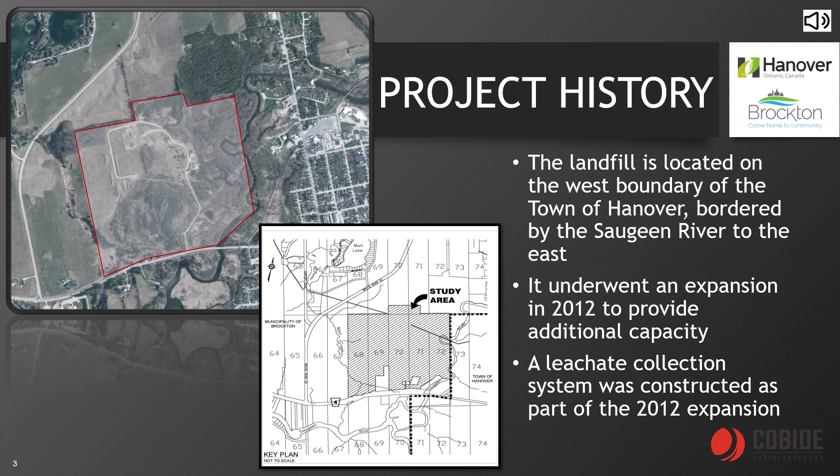During the expansion, a leachate collection system was installed with leachate being stored in an underground tank, which is pumped and trucked by a licensed liquid waste hauler to both the Hanover and Walkerton wastewater treatment plants for treatment and disposal. With projected growth of Hanover and Brockton and the expansion of the landfill to accommodate additional active filling areas, a solution to the long-term management of leachate is required.

Leachate volumes can vary due to precipitation, active area of disposal, cover soil characteristics, and landfill development, and they have become highly unpredictable due to the dry or wet climatic conditions. Based on the original leachate management report that was prepared during the design of the expansion area, the total fully developed projected leachate volume for the landfill was estimated to be 8,400 cubic meters per year or 23 cubic meters per day. It is anticipated that leachate volumes will fluctuate significantly during the active development of cells 1 through 4.

This is because during the early stages of cell development, the drainage layer of the leachate collection for each cell will have exposed surfaces with no waste and will be in direct connection to precipitation events. Although the expansion area is projected to be developed in 4 cells, the design of the leachate collection system must accommodate the entire expansion area once final closure has occurred and at various stages of its active development.

Since the construction of cell 1 and 2 and the reshaping of the slope at cell 1, there has been an increase in leachate being collected from the site. For example, in October 2020 to September 2021, there was an average of 21.5 cubic meters per day of leachate hauled to either Walkerton or the Hanover wastewater treatment plants. This was partially due to cell 2 being connected to the system, as well as the slope on cell 1 being regraded to final grades.

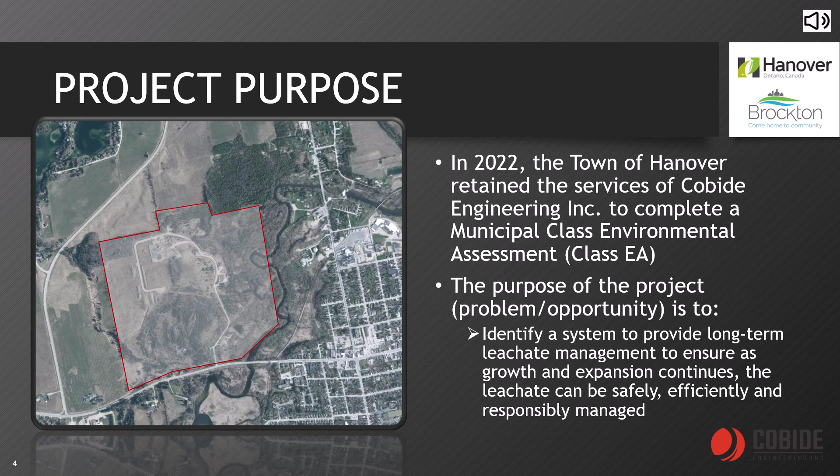As previously mentioned, in 2012, the landfill underwent an expansion to construct cell 2, where an impermeable liner was placed with the leachate collection piping system and backfilled. The leachate collection system drains into a tank on the far south side of cell 2 adjacent to the access road turnaround. This expansion allowed for additional waste disposal area.

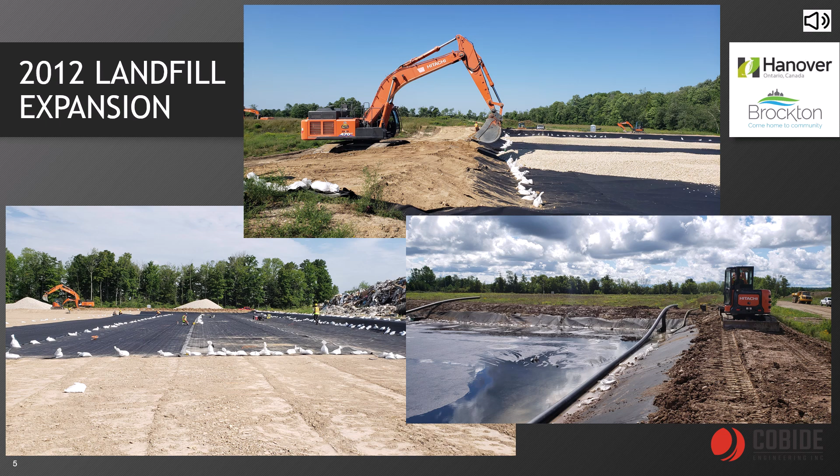In May 2025, a third cell, Cell 3, will be constructed, which will increase the production of leachate and volumes due to the square area that will be added to the current collection system.

The existing leachate collection system consists of an underground piping system that collects the leachate and drains it into an underground storage tank. The storage tank can accommodate 50,000 liters, or 50 cubic meters, of leachate before it needs to be emptied. Schaus Sanitation is currently contracted to pump, haul, and dispose of leachate from the underground tank on an as-required, as-needed basis.

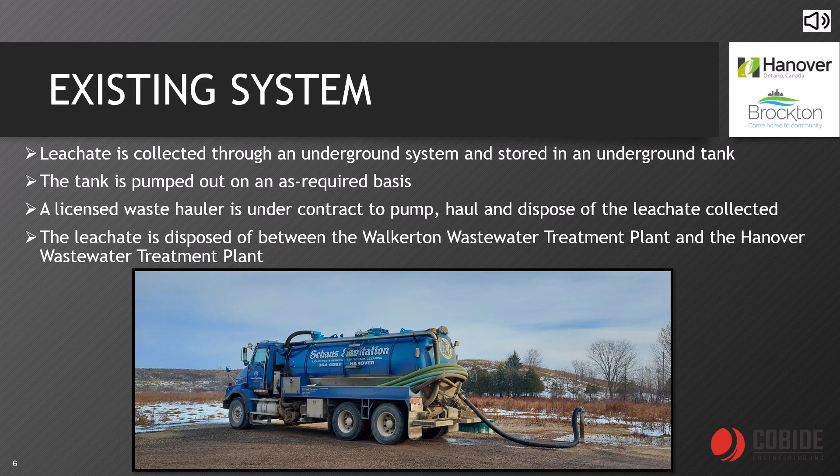The leachate is hauled and disposed of at either the Hanover or Walkerton wastewater treatment plants. Since leachate properties can vary drastically, a slow release of the leachate into the wastewater is required, hence the reason that it is sent to either the Walkerton or Hanover wastewater treatment plants. This method aids in the dilution of leachate, making it a little easier to treat combined with the wastewater.

What is leachate, and what makes it so hard to treat? Leachate is considered any liquid produced when water percolates through any permeable waste material. It can contain elevated levels of general chemistry parameters such as pH, acidity, alkalinity, anions, metals, and other volatile organic compounds.

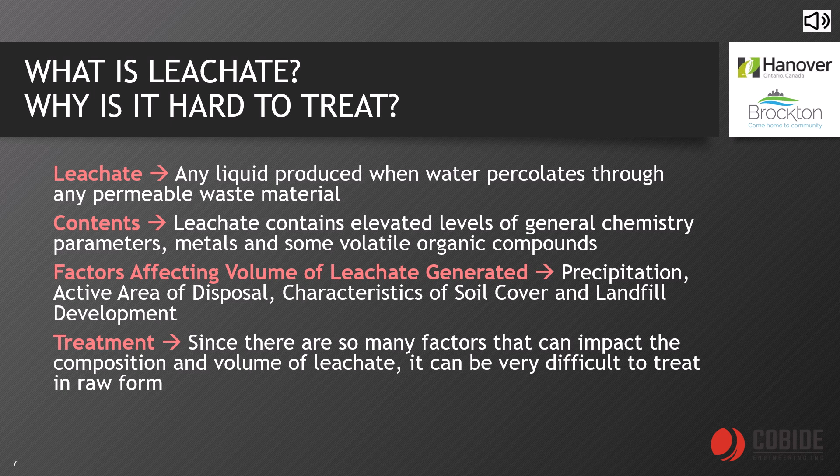Leachate composition can vary greatly due to many factors, such as what type of waste is contributing to it, precipitation and environmental factors, runoff characteristics of soil cover, etc. These factors also impact the volume of leachate generated along with landfill development and the active area of disposal. All of these factors affect the overall treatment since they impact the composition and volume, making it difficult to treat the leachate in its raw form.

Due to the nature of leachate and anticipated increasing volumes with the construction of Cell 3, and as growth and expansion continues in both communities, the Town of Hanover and the Municipality of Brockton decided that a long-term solution for the management of leachate at the Hanover-Walkerton landfill site be explored through the Municipal Class Environmental Assessment process.

A Municipal Class EA helps municipalities plan infrastructure projects by evaluating their potential environmental impacts, ensuring compliance with the Environmental Assessment Act, and fostering environmentally responsible development. It is a process that considers various factors to minimize negative effects on natural, cultural, social, and economic environments.

The MCEA classifies projects in terms of schedules based on varying environmental impact. The classifications are as follows. Exempt: exempt projects may have a minimal adverse environmental impact and consider public notification. Eligible for screening to exempt: these projects may have minimal adverse environmental impact and require completing an archaeological screening process to determine if they're exempt or if they're a Schedule B. Additional public notification should be considered even if the project is exempt.

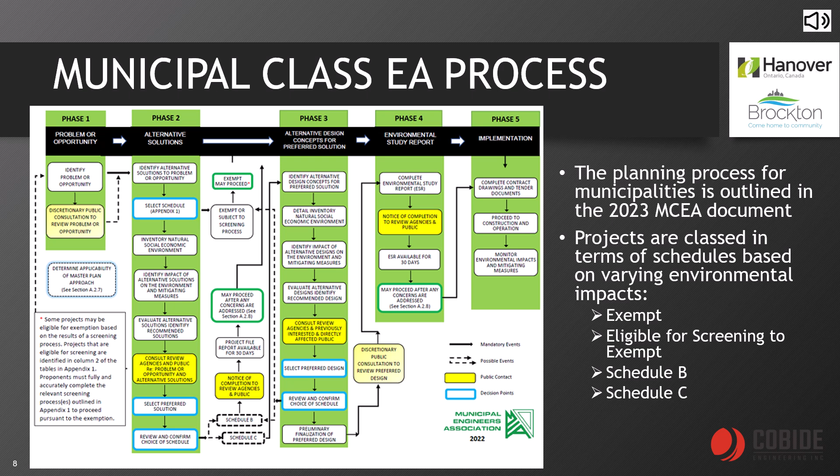The first phase of a Municipal Class EA process is to determine or identify the problem or opportunity. The problem or opportunity for the Hanover-Walkerton landfill is the need for a long-term solution to manage the leachate that is produced at the landfill.

The current method of hauling relies on an individual to determine the frequency of trips and number of times the tank is required to be emptied. This is not a long-term solution to a long-term problem and operation. The landfill will continue to expand and generate more leachate along with the current and future expansion.

A notice of commencement went out to all stakeholders, adjacent landowners, and rights holders, providing information regarding the initiation of the Municipal Class EA. A notice was also placed in local newspapers. The notice provided opportunity for public, stakeholders, landowners, and rights holders to provide initial comments regarding the EA.

Through consultation with the Town of Hanover and the Municipality of Brockton, 4 alternative solutions were derived to meet the needs of the problem or opportunity. From the 4 alternatives, the project schedule was selected based on Appendix 1 of the MCEA guidelines.

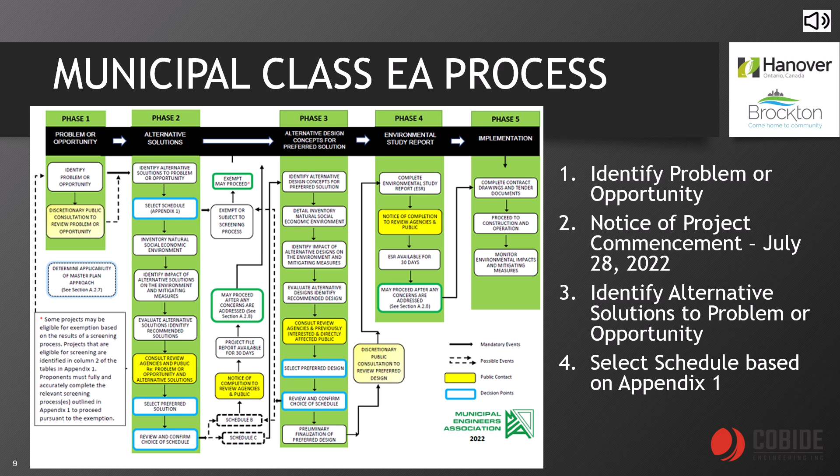There are 5 phases of the MCEA planning process. Phase 1 is to identify the problem or opportunity. Phase 2 is to identify alternative solutions to address the problem or opportunity by taking into consideration the existing environment, and establish the preferred solution, taking into account public, Indigenous community, and review agency input.

Currently, we are at Phase 2 within this Municipal Class EA process for the Hanover-Walkerton landfill site. Through this Public Information Center, the preferred solution will be selected based on comments, concerns, feedback, and consultation with the public, stakeholders, and Indigenous communities. Alternative methods will be examined if input is received and will be part of Phase 3 within the MCEA process.

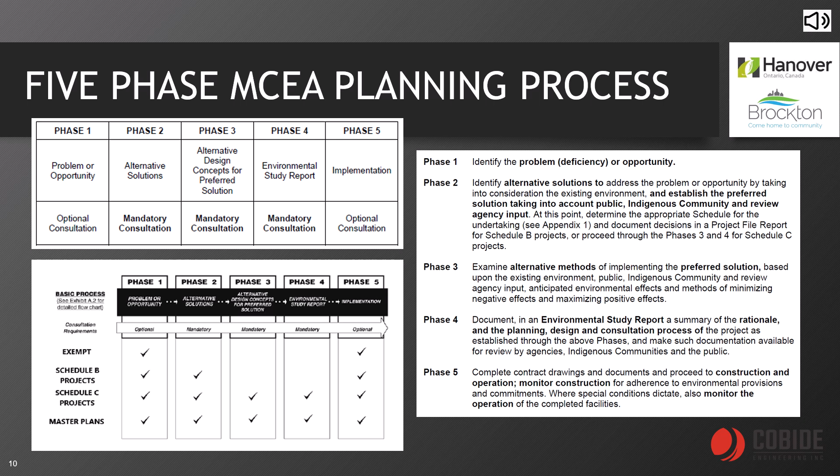Through discussion with the Town of Hanover and the Municipality of Brockton, the following 4 alternative solutions were derived. Alternative 1: continue to haul leachate to both the Hanover Wastewater Treatment Plant and Walkerton Wastewater Treatment Plant; this is the current method. Alternative 2: on-site treatment and surface discharge. Alternative 3: proposed pumping station and force main to the Hanover Wastewater Treatment Plant. Alternative 4: purchase a truck, operate, and haul the leachate internally, using qualified town and municipal staff.

Alternative 1 and 4 would be exempt from a Municipal Class EA. According to Appendix 1 of the MCEA guidelines, both alternatives 2 and 3 would fall under a Schedule B project.

Alternative 1, hauling leachate to both the Hanover Wastewater Treatment Plant and Walkerton Wastewater Treatment Plant, is the current method. In this alternative, the current method of hauling and treating the leachate will continue and is deemed functional for the short term. Given that leachate volumes have been difficult to predict, the hauling and treatment costs can vary from year to year and when new cells are being constructed.

Replacing this method with permanent infrastructure will be more cost-effective in the long run, as continuing to haul leachate has been identified as having a higher life cycle cost.

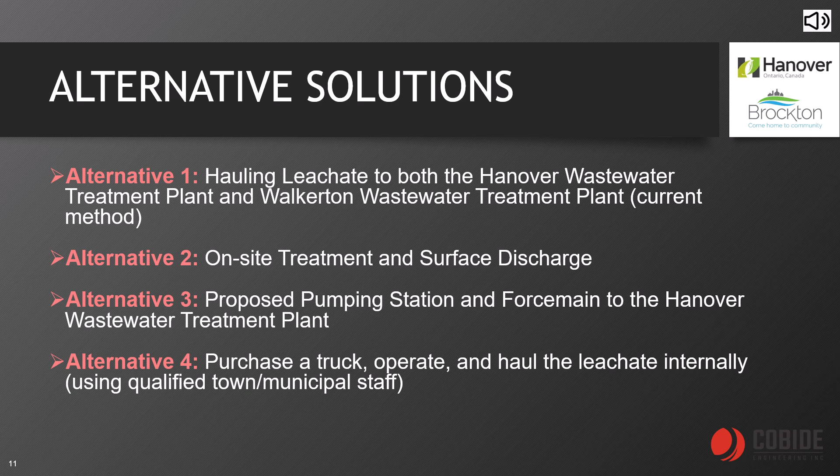This option has some challenges, as Alternative 1 does, and a slightly higher life cycle cost, but may be more reliable and sustainable in the long run.

The MCEA process outlines the following key considerations when developing, assessing, and evaluating alternatives. Land use planning: is the alternative a good use of land, and will it achieve the desirable social and environmental outcomes while optimizing resource use? Does it follow planning objectives and policies identified at the provincial and local levels?

Natural heritage features: what impacts will the alternative have on landforms, groundwater, surface water and fisheries, terrestrial vegetation and wetlands, wildlife and habitat, and the connections provided by or between these resources? Natural heritage features should be identified early in the EA process to determine significant features and potential impacts.

Specific policies at the federal, provincial, regional, or local level should be reviewed and identified as part of the EA process. Social environment: does the alternative encompass the external conditions, social connections, and interactions within a community that influence individual and collective well-being? The social environment includes existing communities, residential areas, and recreational areas.

Significant negative impacts to the social environment should be avoided where possible. Where they cannot be avoided, effects should be minimized where possible, and every effort made to mitigate adverse impacts. Key considerations are the overall community impacts to residential property and access, community facilities and access, recreational facilities and access,